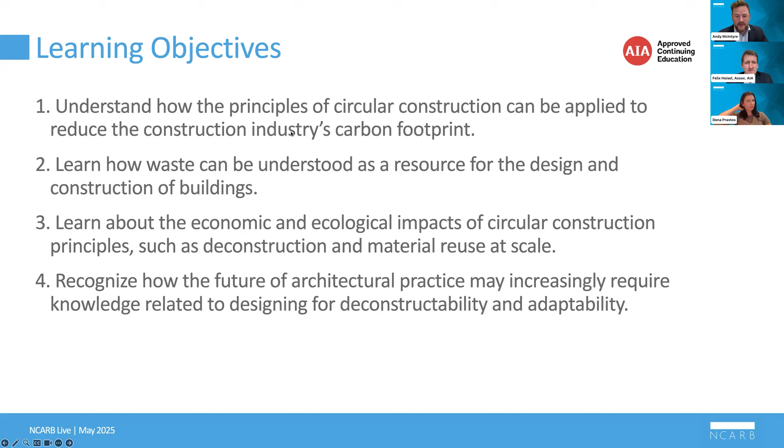Great, thank you. I was asked to speak a bit louder, so let me know if you can hear me well or not, and I hope you can see the screen. Thanks for the introduction. As you mentioned, we're talking about design for deconstruction, or deconstructability and reuse, today.

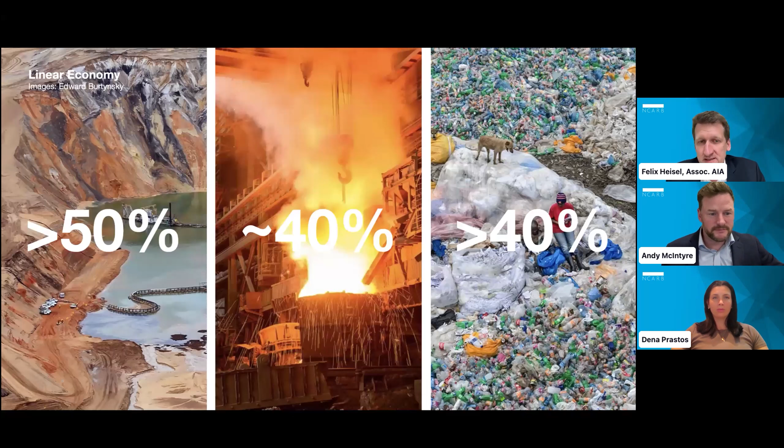And it's sort of started or founded in an understanding of our built environment's impact. If you take buildings together, building and infrastructure from the beginning to the end of their life, then we're estimating that about 50% of the resources that we're taking out of the Earth's crust can be attributed to that industry. We all know by now that 41% of carbon dioxide emissions come from the built environment, but also 40% of solid waste generation can be attributed to the built environment. And so that's, of course, a massive impact that we all sort of contribute to.

And if we look at one of these, the carbon emissions, in a bit more detail, we all know this exponential growth chart. What is interesting, and these are numbers from Architecture 2030, is that if we want to achieve or meet the Paris climate agreement goals to limit emissions to the pre-industrial time, or reduce them, then we need to reduce emissions by 65% in the next ten years.

This chart talks about pre-2030, and we all know how long cycles are in the built environment. So basically we need to reduce emissions by tomorrow, considering the time it takes to build a building, or go from design all the way to the opening of a building.

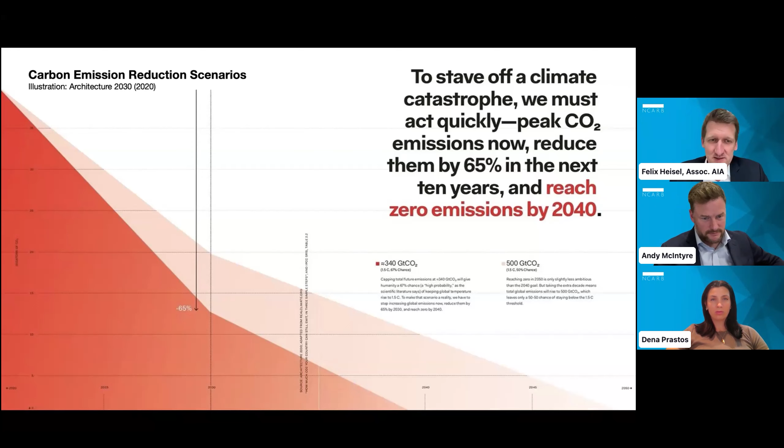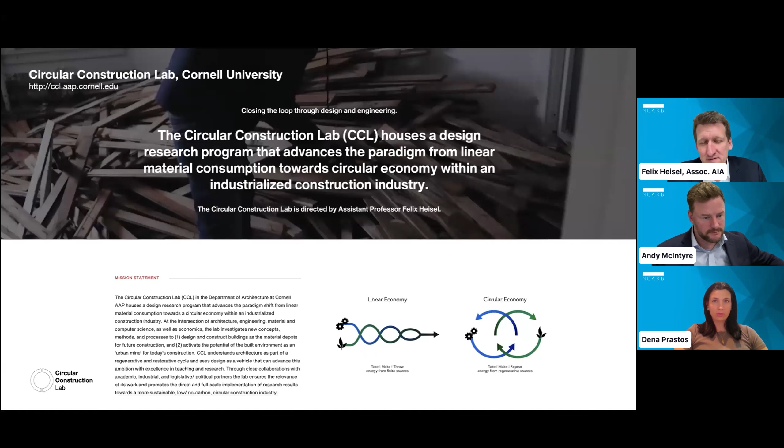The Circular Construction Lab addresses this from two angles. One, what do we do with all the materials bound in today's buildings in the existing environment, and what kind of techniques, technologies, or tools do we need to reactivate these materials for the market? Second, how do we design differently moving forward so the buildings we're building now don't run into similar questions at the end of their life in 50, hopefully 200 years down the road.

The team is a group of students here at Cornell University, ranging from bachelor to master to PhD programs, but also across different disciplines, from mycology to biology to architecture to engineering, because it's a systemic question we're trying to answer. This cross-disciplinary approach is key to how we answer these questions.

What we're aiming towards is a circular ecosystem. What you see on the screen are different ways to close the loop, to design both the raw material sourcing and waste out of the system. But I want to highlight the importance of that reuse cycle as the most direct, most local of the circular economy strategies we have to choose from, and with that, the most impactful. We'll go into more detail on that in the next couple of minutes.

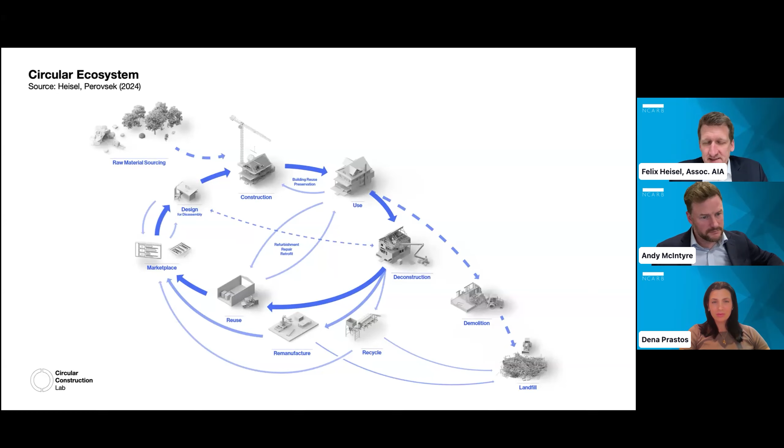The problem is that the realities look more like this. This is a picture from a recent demolition site here in Ithaca, New York. The contractor is very proud of this image. It shows how the steel is being collected, how all the concrete is being collected. The concrete is all ground down, recycled into aggregate, or in this case, clean fill. And all the steel is recycled and sent overseas.

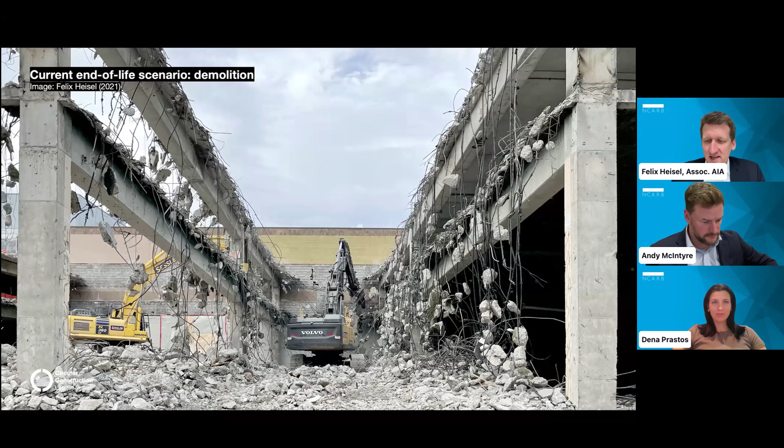But it also manifests the problem of the recycling industry, right? We're celebrating the fact that a former structural material is used as clean fill on a landfill, and that steel is shipped miles across the ocean to be recycled, and the emissions from that ship probably offset the recycling impacts of that steel. The recycling industry is a global industry with global impacts, and with it come externalities that I think we're not completely understanding in their totality.

Another example is this aerial picture. This is a development in Ithaca, again a case study where we convinced the developer to deconstruct one of 11 houses that were taken down for a new development. So what we're comparing here is demolition and deconstruction of similar housing typologies right next to each other, in an academic side-by-side scenario.

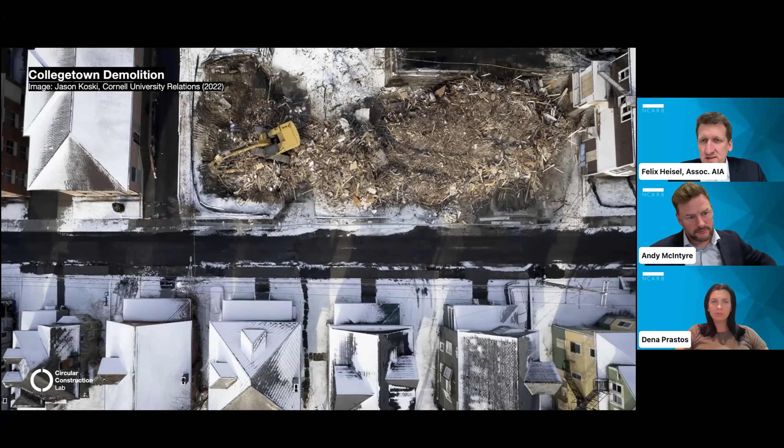Our proposal was panelized deconstruction. This means essentially cutting the house into the largest possible pieces that still fit on a flatbed truck, to then bring those off-site and reactivate the materials by taking these panels apart at an off-site location. What this does is essentially get us cost and time competitive with demolition in this specific case study.

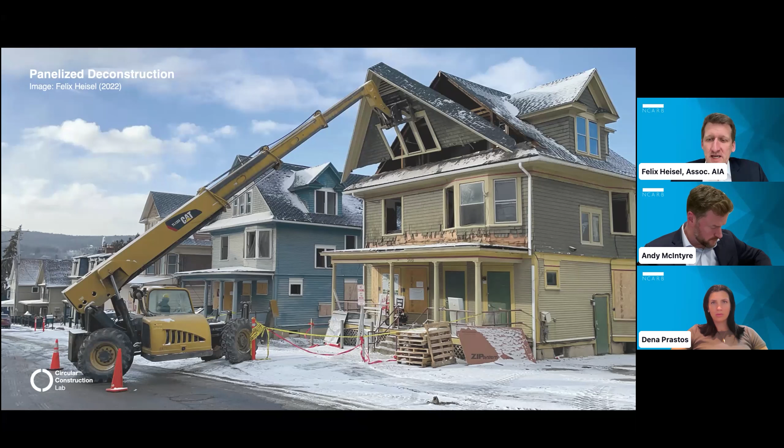So after 4.5 days, this 4,500 square foot house with 13 bedrooms, a student housing project, looked like this, all panelized at this local reuse center here in Ithaca. The comparison in the end showed that the resale value of the materials we salvaged offset the additional labor needed for the deconstruction.

So the question then was, what do we learn from this? What do we want to, why do we want to engage in deconstruction, and what can we add to this conversation? One big question was, what is even in these buildings? What kind of tools do we need pre-demolition or pre-deconstruction to make smarter decisions?

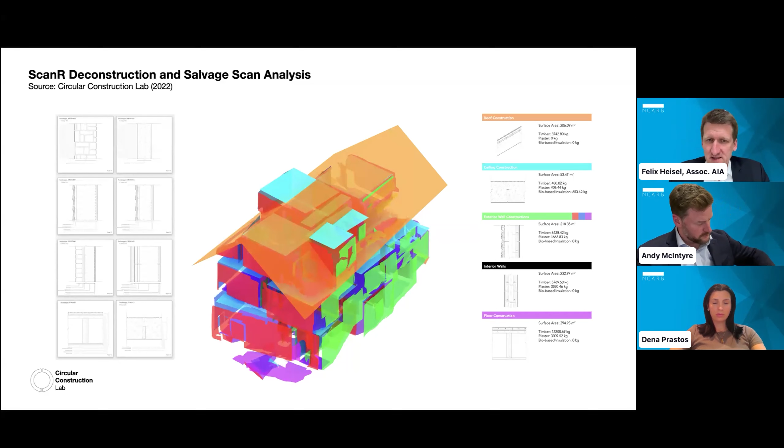So we're working on a tool called ScanR, that estimates material quantities with a very low-res scan, using your cell phone to get a low-res point cloud, and then connect that with open data and available archetypes to make detailed estimates about material quantities and potential reuse scenarios for these materials.

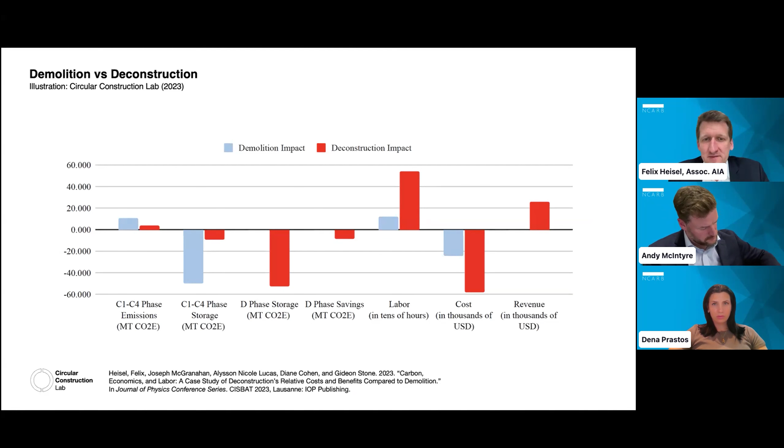We did, as I mentioned earlier, a very detailed analysis of the benefits between, or the impacts of demolition and deconstruction. Here you see this offset of the revenue that then can be attributed to labor cost. But it also shows the benefits from an environmental perspective in the embodied carbon that was saved, for example, through this project.

And that's sort of the point that we maybe want to talk about most. It, of course, is a workforce development opportunity. A demolition project tends to have about 2 people on site - someone that drives the excavator and someone that holds the hose. In a deconstruction project, you have about 6 to 8 people on site. That's where the additional labor cost comes from, but that's what we want to show as an opportunity for workforce development, for green workforce, for local salaries and wages, and for the development of that workforce within a larger context.

One recent work that we did was extrapolating these benefits to a state level. In this case, these are numbers for New York State. We published a white paper estimating the potential of a shift in this. We're assuming about 15 to 20,000 residential demolitions in the state. If we're shifting either 50 or 75% of those demolitions to deconstructions, that has a $3 billion economic impact that saves about 90% of these materials that still have value in the end and creates 13,000 jobs.

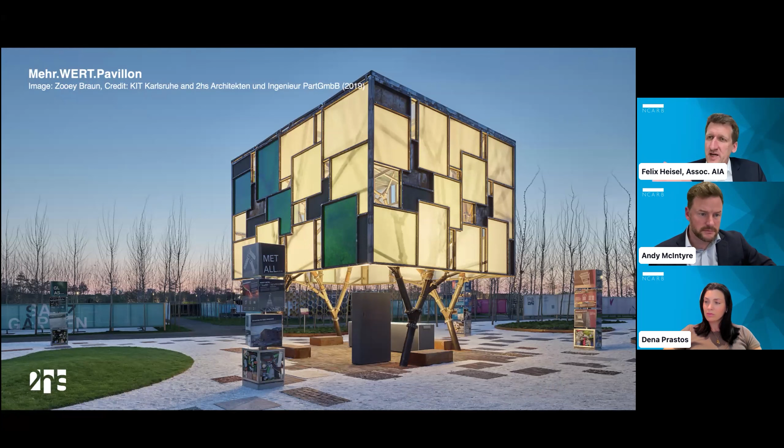This is an example where we used only secondary materials, so there's no virgin materials whatsoever in this project. The steel, for example, is directly reused steel from a former coal-fired power plant. And that, of course, asks questions about how do we design with a non-standardized stock, or how do we get those through certification processes? And that's, I think, where these demonstrator projects become so important to pave the way for a more industrial or industry-wide application.

I want to talk a little bit more about a local example that we did in the lab. This is called Circulating Matters.

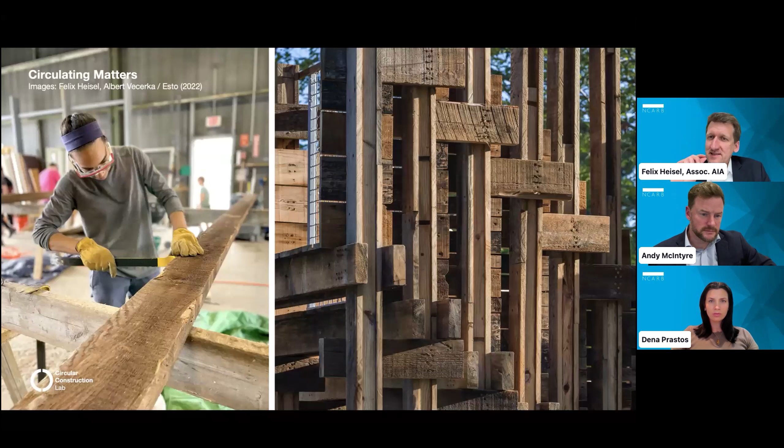And it's a small structure on the Cornell Arts Quad that was built from some of the materials we gained in that deconstruction project I showed you earlier. The interesting thing is, although it's a really small structure, it was large enough to require a full building permit.

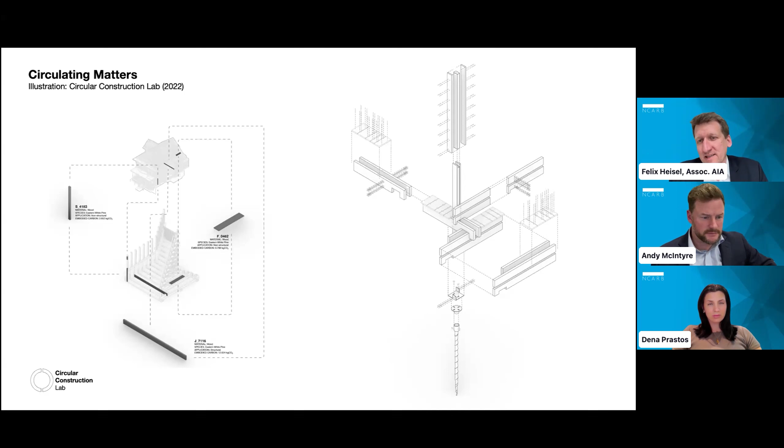So those are kind of the aesthetic and architectural means, but we also learned about material passporting. How do I make sure I know where a material comes from, where it is now, and where it's going next, and how do I connect the digital and the physical, or detail with non-standardized stock where you have a tolerance difference of about half an inch between different lumber pieces.

And what kind of changes does that require in the way we detail our construction. But most importantly, towards structural reuse, was the question: how do we design and engineer when we don't have certainty in design values, in engineering design values?

So we did an analysis of how do we determine, for example, the species, because right now the engineering design path is figuring out what the species is, going into your textbook, looking up the numbers, and using those as your calculation inputs. But if you don't know the species, how do you do this now?

We sent out samples to 3 different experts and got 3 different results. So we were kind of discouraged from that as the standard.

Other alternatives are, of course, static bending tests, but the sample sizes usually omit that. So one option we see as valuable is to go by density, or specific gravity, because that's something you can do easily with small samples, on site. And it turned out that density is actually a really good determination for structural strength in this case.

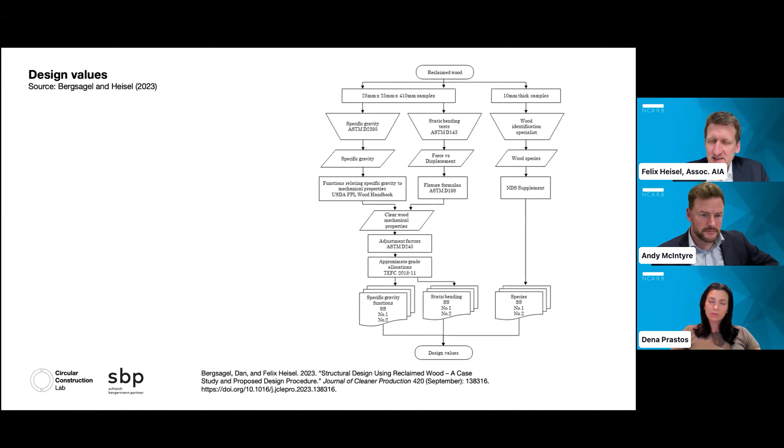But that's something we keep working on. Maybe more interesting is the question, how do we go down the regrading path? We're currently developing technology that uses AI and visual grading algorithms to automatically specify the grade of salvaged lumber.

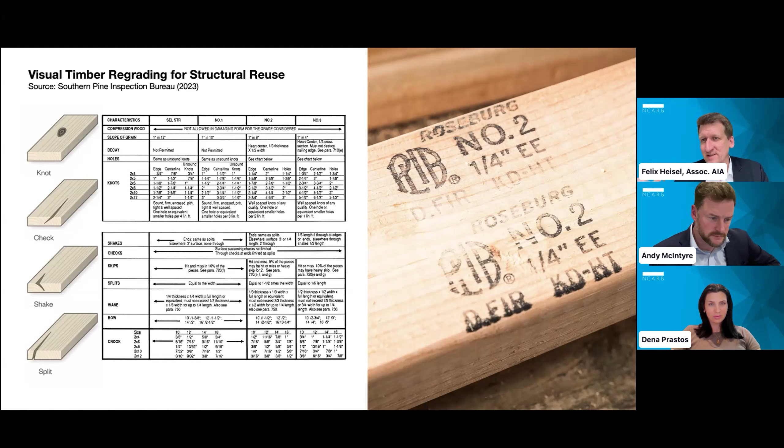That's in development, but I see a really big potential in technology applications that help create a cheaper path to reapplication. Because of course a visual grader is available, but all these steps require time and cost and are usually barriers to scaling a process like this.

But again, there is also ongoing legislative development in these areas. This is another bill currently in New York State, discussed in the Assembly, that would automatically assign a stud grade 2 to salvage timber.

This is not a new invention. This has precedent in both Washington State and Oregon State, which have similar codes and legislation already on the books.

And that's an amazing step, right? Because you have suddenly an auto-assigned structural grade to lumber that comes from deconstruction projects, and at least allow you to do timber framing. But that's, in our case, like 90% of projects, at least in the residential market in New York.

And then to close out, we're also developing design tools, because we noticed the conversation about circularity usually comes too late. This might be an outdated statement, because so much has happened in the last 2 years in our industry. But when we started developing the tool, the question of circularity was usually discussed at the end of construction or the design process, towards documentation for the future.

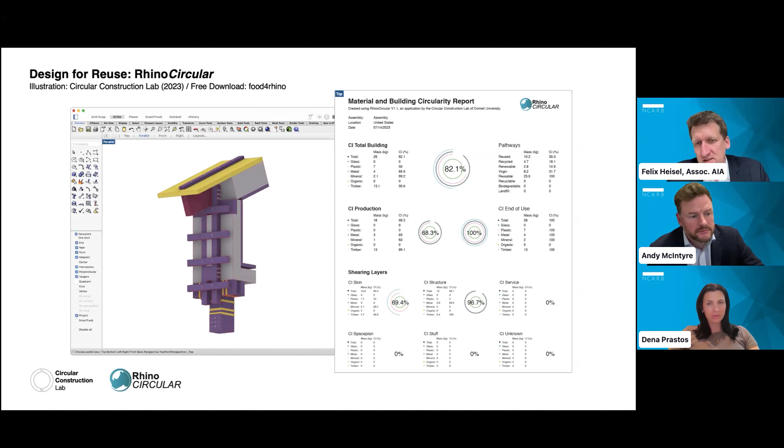And so Rhino Circular is a free software for anyone using Rhino and Grasshopper that can do that for you, embedding this information into the platform in the canvas, giving immediate feedback to design decisions. I just wanted to make people aware of that option.